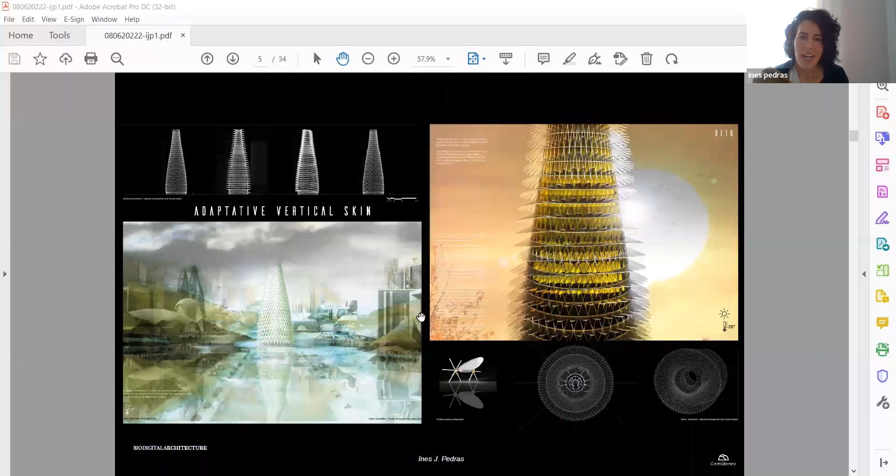Here is an example of how these environments change. We create an artifact that has different configurations, like on the left side is the vertical tower in the winter. It's a simple topic, but I want to translate this idea of environments and how they live like a living organism—the building, for example, needs to be closed in winter. In summer, it rotates the scales, or petals, related to any flower, so it opens to the sun. The configuration varies between winter and summer.

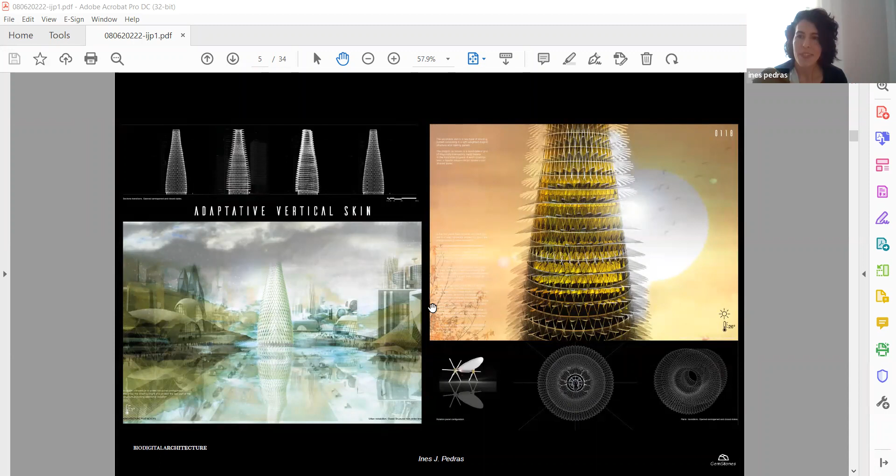This notion of living organisms is a key point of my approach. So I started creating this material as a living organism, as I say. It started to create these cells by itself. When I have this material that I make myself with my own tools, I am trying to put it in a place.

For example, here I work a lot with small details. I want to go from the very big scale to the small scale, even microscope scale, and then focus on the constructive detail, how this can be related to the construction. I want to explain that the material is more than an element—it's a shelter of protection.

It gives me textures, it gives me color, it gives me light, and establishes the atmosphere of space and characterizes its existing reminiscence. It's the physical interpretation of the design in space, where it brings to life and allows for a set of multiple correlations between the user and, in this case, the architectural artifacts.

These architectural constructions are computer designed from the small detail to the biggest scale. Everything is computational, and you can change the parameters, and you can see the length and the difference in the corners, and all this is related to membrane materials.

I also like textiles, so you have this kind of textile, and you give it structure to hold the stability. The same happens with the construction details—it becomes a research organism that develops all its functions in the membrane.

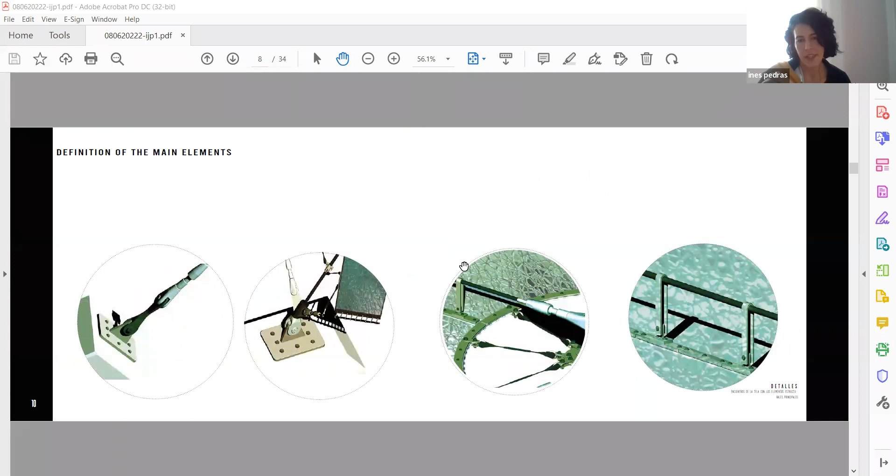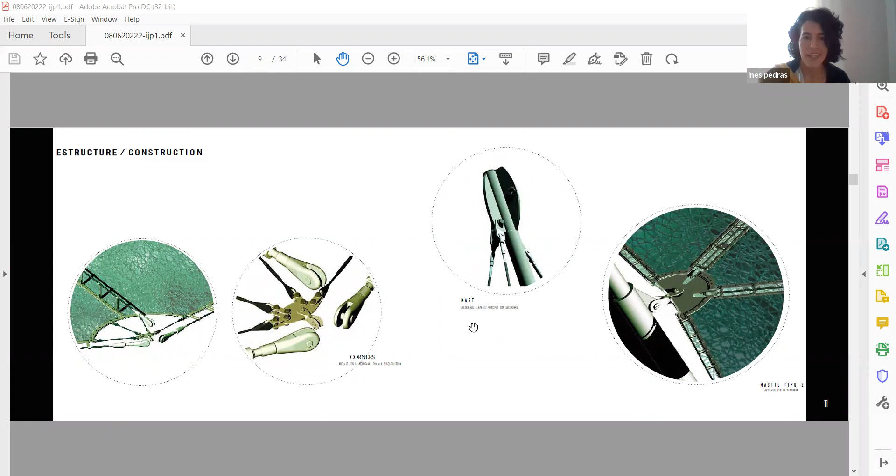I think it's easy to understand—here I define the main elements of the membrane, like the anchor points, the flexibility corners, I have the mast. This is membrane, just membrane freeform architecture, and the corners, how these construction details of the corners work.

I started to detail every small piece of it. The construction details give us the character of the intervention. It could be just a constructive detail, but it could also be a piece of art—it has to be designed at a small scale, but it's also like a big thing.

Even in the exhibition, I want to explain all these constructive details that are 3D printed, and how they construct the maximum perimeter with the minimum material, just with small connections. The membrane constructive details are one of my favorites because they give us free forms—this is very flexible and generates less impact on the surroundings.

This is very sustainable, because it's not just that you put a fabric or a very strong structure. You put just a textile, a membrane with a connection and a constructive detail, and it's very sustainable.

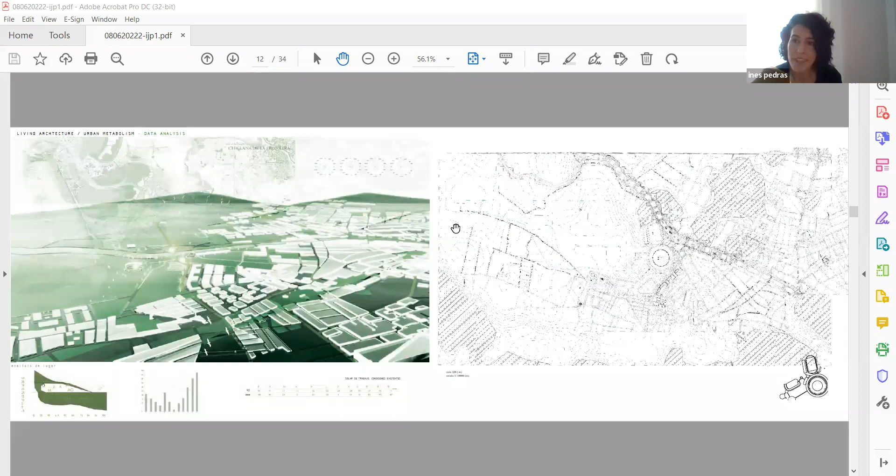The ways the cities, the light, the pre-existences, the buildings that happen in the place will modify the project, and also the wind, the landscape, the topography. Here in this case, there was a river nearby. So all of these membranes are related to the environment. The project works a lot with the environment.

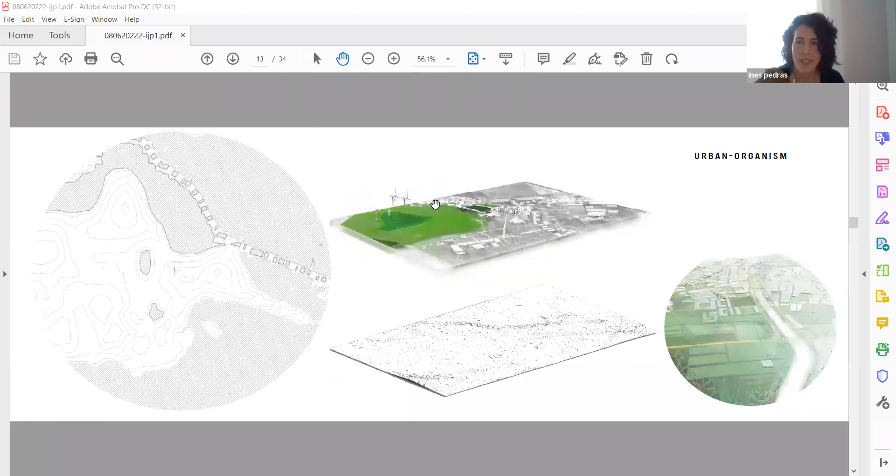Even my exhibition, it's not the same to be there than to be in another place. The environment is everything. Here, for example, we see this mapping of Barcelona, and in this mapping we see these roads that configure the membrane. So they have this kind of geometric shapes, like a painting connected with branches that grow in different directions in an organic way.

So we can see a urban city, we can see a small microbiome growing along the flexible material. We can see in 2D these branches grow in different directions - it's just a matter of perspective.

I translate, this is, for example, an idea of how the waste materials that happen in Barcelona create a datascape. It was related to another project, but it was like this landscape of data that applies in digital forms that I can create with parameters.

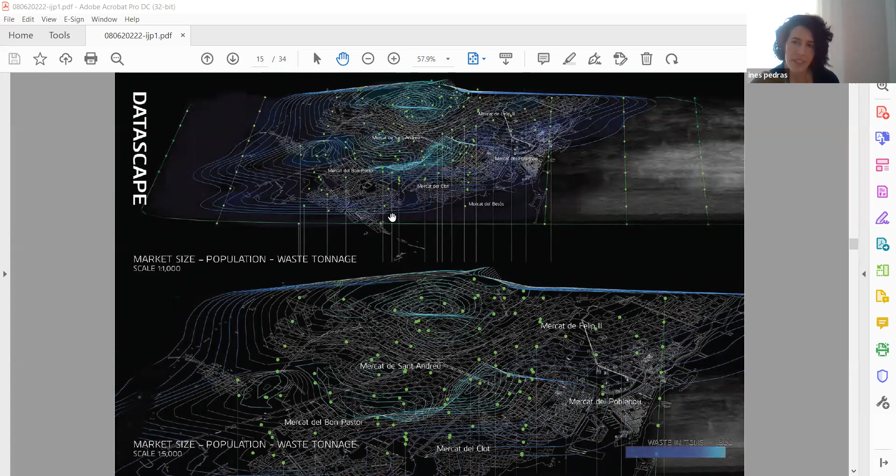So I am working on the computer, putting in different data, and the data creates the landscape. It's related to a realistic project happening in Barcelona with all the waste material, the data, but it's also related to a landscape that creates the data. So the data itself creates the project.

For example, here is a constellation of different data points that creates - the main points are the places where the waste is bigger. This creates an environment, a triangulated environment from the urban space. As I see here in 2D, we see a triangulated map, a constellation mapping.

It's in 2D, and I want to translate this to the workshop that I did in Tashkeel, because it was super - in my case, I love to teach people in 3D dimensions. People in the arts work a lot in 2D, but 3D gives us another view. So we started doing our workshop with 3D structure.

It was with very easy materials, very open to work with hands. With this constellation mapping relating to data, we created these kinds of structures - it was so much fun. At the end, we created this just to learn how the triangulated structure gives us the most stability, because the triangle is the most simple, but also the most stable form in the geometrical world.

So the basic shapes give us the most stability. And this kind of concept - less material and most properties - is related to the maximum perimeter, less material, and less toxic materials, so more sustainable.

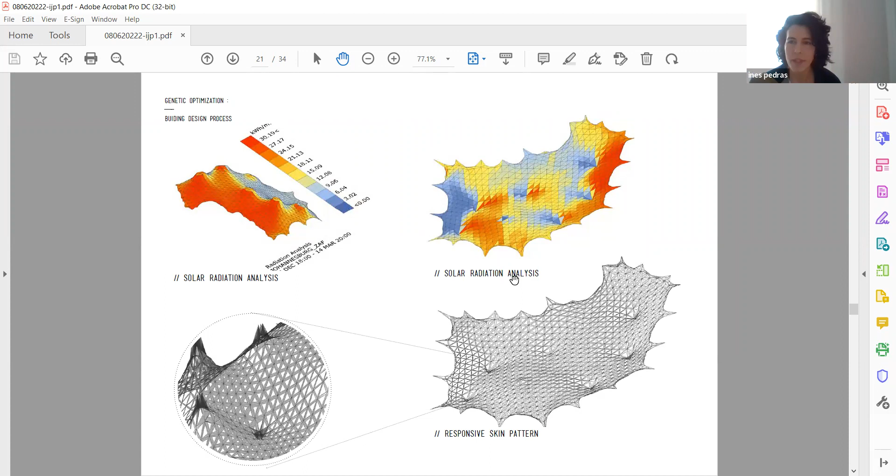So here is another analysis, but in this case it's not just forces, it's optimization in terms of solar analysis, like we put exactly in Dubai where there is a lot of sun. So we need to do a lot of solar analysis. There are points where the radiation of the sun is bigger than others, so we have these tension, critical points that we have to analyze in more detail, and these construction elements we need to focus on.

So here are all the results from the catalog, from the solar analysis. All of these analyses give us data, and with the data we translate it to the project to see - it's important not just to see, sometimes the data changes the project a little bit, but in general it's just to know if it's working.

And here there are different masts, like the membrane is hosted by masts, and there are forces in it that have to be taken care of. So there is a notion of integrity that I want to explain later - how the individual parts have to be in equilibrium and working well themselves to work as a whole structure. The individual parts can't work alone, they have to work together.

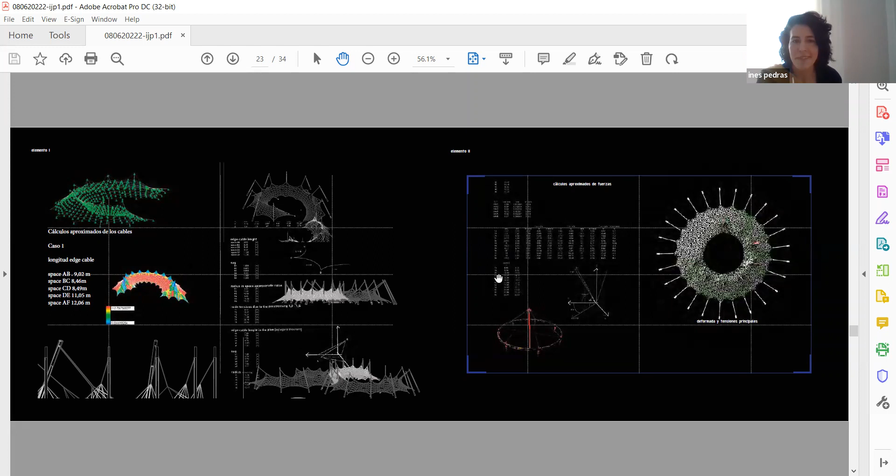So all this data in the computer, at the end, is also related to humans - like we have to work together to achieve good results.

So the project, more architecturally, translates into these growing organisms, like an animal growing into the landscape, and we create these free forms that grow along the landscape.

All these lightweight membranes are very flexible, but also have a lot of properties. As I said before, they achieve the maximum perimeter with the least material possible. They cover a lot - it's like you put the cover.

Here they grow like different branches, in different directions, like a star - starting at a middle point but growing along the landscape, along nature. So it's biodigital, but not just a replication of nature, just its behavior. Nature has the more optimal mathematical forms, so it's a replication of this kind of behavior that we found in biological processes.

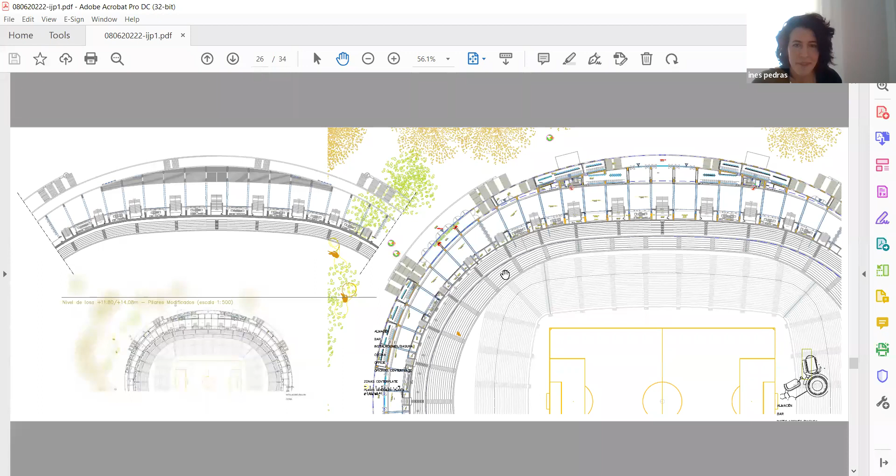So this project's program was related to a big stadium - because of the maximum perimeter concept, for example a stadium. So the architectural program was a stadium. It could be another thing, but in this case it was a stadium, with different elements and in the middle, the football field.

For example, here we see the facade as a branch of biological growing elements - we see it as a building, but also as a growing animal along the landscape. This also creates a lot of shadows, because the geometry is very specific, very unique, very organic, and gives us a lot of properties like shadows, light, textures. It gives the character of the place at the end.

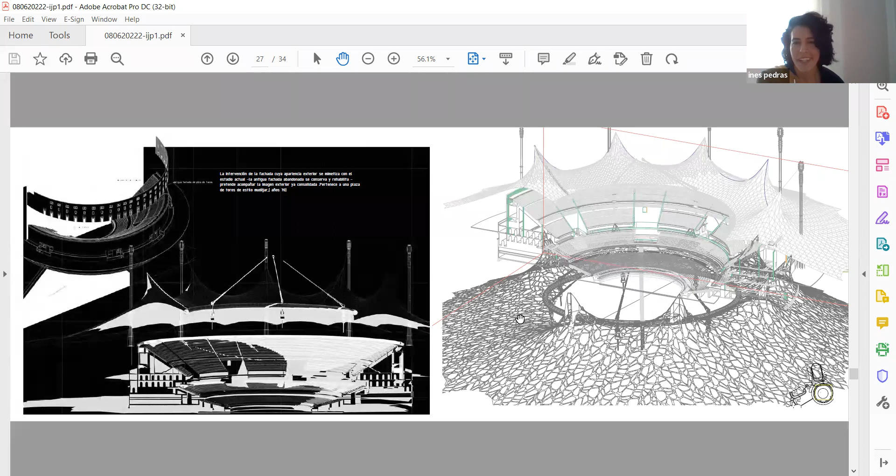So yeah, this is the plan and the section. And here, people sitting inside start to see this new atmosphere that grows with them. So they feel like they're not in a super stark place - they feel like they're part of nature, they feel like they are part of themselves. So this architectural plan wants to translate this notion.

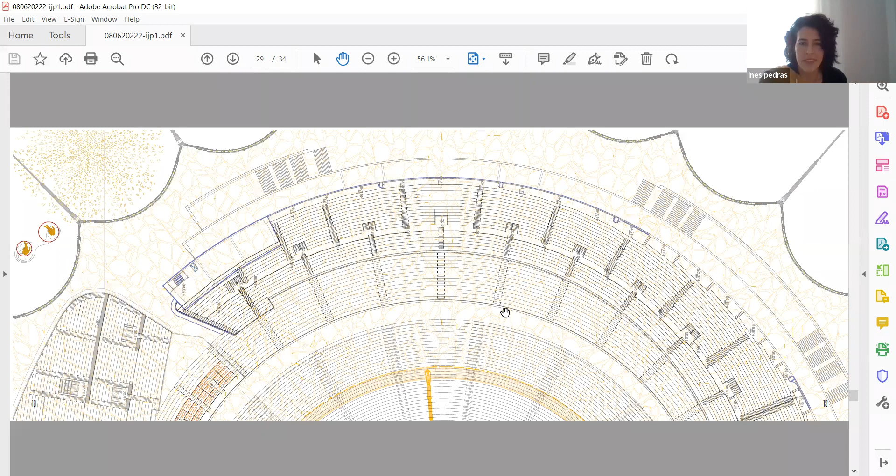Here is more the constructive detail. Everything has to be detailed down to the small pieces that have to be studied, just so we don't lose materials - if we do something wrong, it's not sustainable. So we need to study beforehand.

So we have the tools - the computational design tools give us capabilities, in the past it was not like that. So now we have the tools, we have the robots, so we can create as fast as possible and into detail.

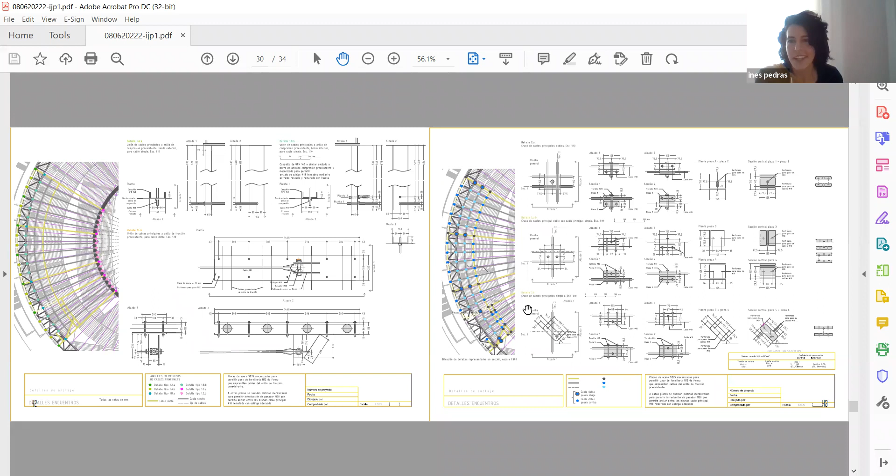Here is the structural analysis of how this membrane works. So I started by cooking the material myself, and then I started to create something very big. And now we have to study all of these structural elements, the construction elements, and everything that works - how to translate a very conceptual idea into a very realistic, very technical way, from the very free-form idea that came from art into a very specific structural way.

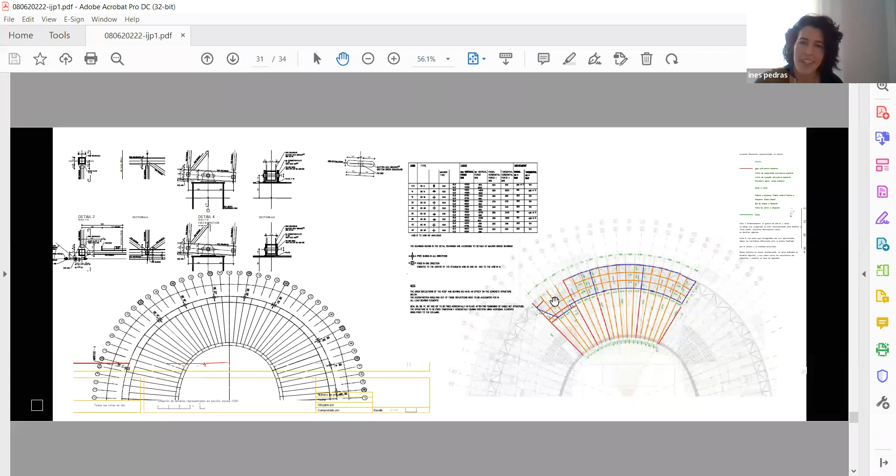And this is more elements, how these nodes are connected to each other, like the circle in the middle, and the masts, how they are connected with them. Just the small details of the construction. And yeah, I also like to work with simulation, just a small simulation of this growing organism working together.

So here, I want to focus on the construction elements. We have this kind of simulation in virtual reality, this is very fast, something very fast that I did.

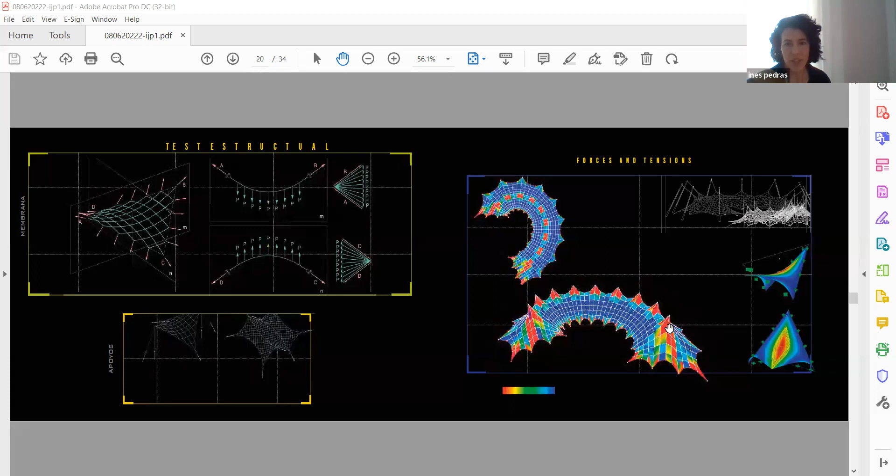The membrane has like the triangle, all are the same, no? Started with a triangle, for example. And from the triangle, I started to aggregate more, and create different geometrics. So a triangle is the simple shape, but if we put another triangle, it's not a triangle anymore. It's like a hexagon or a pentagon.

So it started to grow by aggregation, and also by scale, by rotation. So you apply different parameters to a simple geometrical part, and it started to grow in different directions, and it has to have different properties, and it's another thing, no? It's like transforming into something different.

Yeah, so these geometricals have different integrities, but they work together, no? At the end you see the result. For example, here you see a structure, or you see something here, no? But each element, or each node, each triangle has its own properties, and the whole of the properties constitutes the whole.

So this is the integrity as a society, no? Because it's very important to work in society. Everyone has their own part. Everyone is important, as in the geometry.

Every node is important, and it's also about changing the world, to do something different, to create new models that make what we have obsolete, so to create something for the future, because we are all going to live there. So we have to have this knowledge of what's coming next.

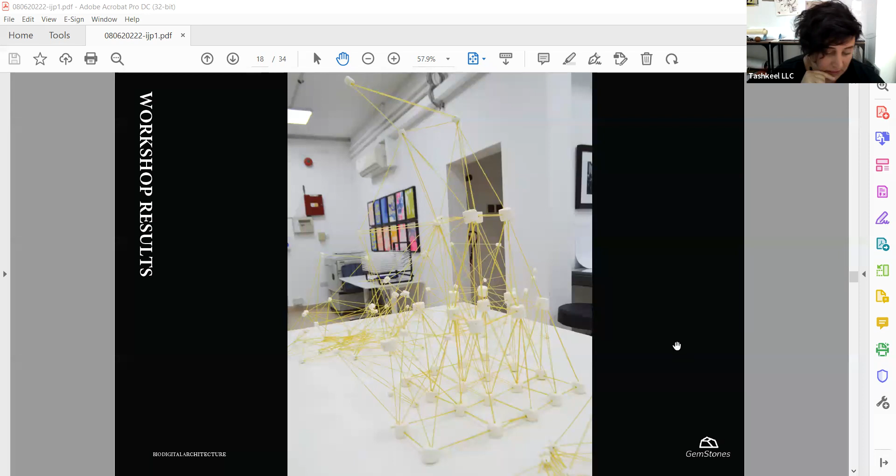Yeah, I mean, you do speak about, like, when you're also answering with regards to the humanistic values, it's more of a symbolic, philosophical understanding. Yeah, it's more philosophical, but with a practical side. I wanted to say that, like, with a practical tool, no?

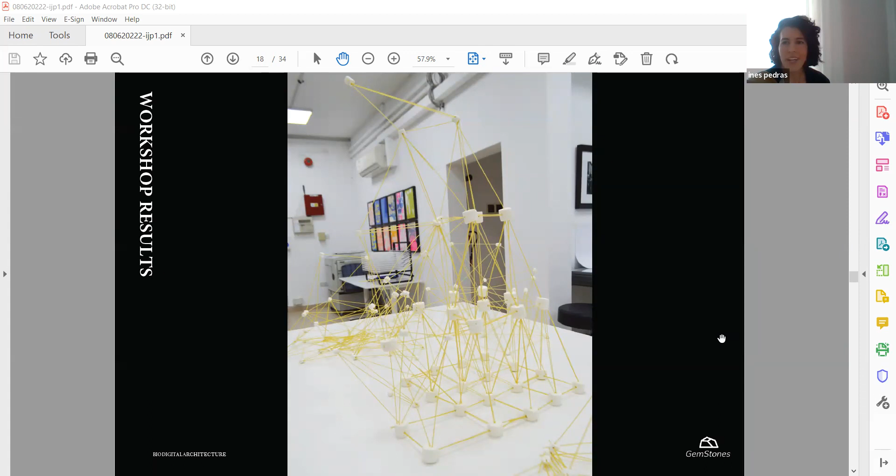So we see, because I wanted everything to have their own meaning, no? It's not just to see and nothing happens. You see it there, and it changes your mind and inspires you in a different form of thinking. So you didn't think about that before, and now you have a new window of opportunity to think differently, to open windows to new things.

Yeah, so you do speak about geometric integrities, or integrity in general, with, as you say, a philosophical understanding of it on a humanistic value, but you also refer to a non-anthropocentric understanding or view of these structures. So I wonder how that interplays.

Yes, we are not the most important, like humans. We have so many differences, and sometimes we don't work in the right direction. So I want to put it in a scale that shows we are very small, and how even the universe is so big, and sometimes we think we are the most important species in the world, and then there are like small microbes that give us...

Oh no, we are not. You are not the most important thing, the most important element on this planet. So this is kind of the view, no? So I started to be more humble to nature and more humble to our planet.

So really, the integrity at this level in the work is at the level of materiality and the parts, but also at a non-anthropocentric level, because it is kind of mimicking patterns that exist in nature that are not necessarily anthropocentric. Yes, correct. Right. Okay, yes. It's not that, yeah, I don't know if it's easy to explain, but yeah, it's exactly that.

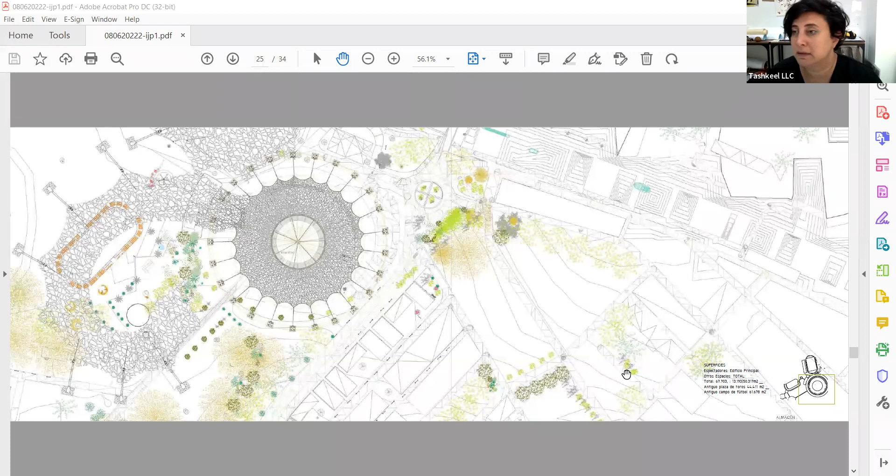Yeah, I mean, we have been in the material turn, as they say in art history, there was a shift in the view of anthropocentric versus non-anthropocentric. So it's now geared more towards material agency within this new materialism understanding. And I'm interested in understanding from you, you label materials as systems. How are materials systems?

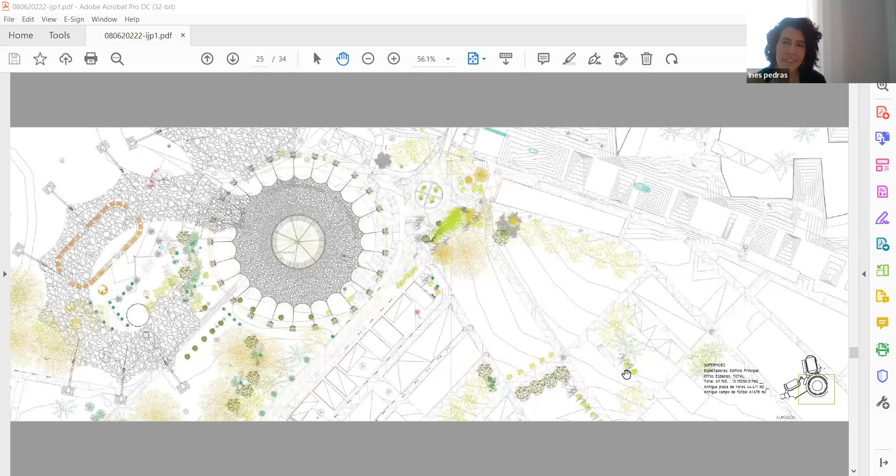Material system, no? So for example, the constructive elements that hold the material, creating all these constructive elements, give us the system. It's like the material, for example we see these green things are the membrane, but the membrane is surrounded by these structural corners and these flexible unions. So the system created from the material, this green thing, creates the whole system of elements around it. This is the material system.

So physically, the material itself is structured within a system that has a human intervention, right? So material systems are a combination between non-anthropocentric and human elements. Good point. Yeah, right? Yes.

I'm gonna push you on this point, but we have a question, and I will read the question. Do you think the selection of the materials used emphasizes the creation of contrast between the built environment and nature, or is it the architectural design that must create contrast?

I'm not sure if I understand. So the artificial element gives us more... No, say again please, it's two parts. So do you think, okay, do you think the selection of the materials used emphasizes the creation of contrast between the built environment and nature?

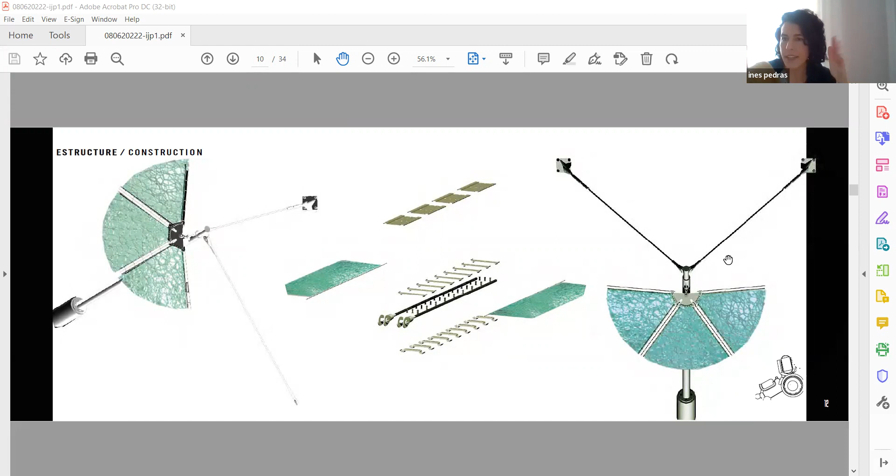The behavior is like, it's cold, so I'm putting more of this. It's summer, I'm putting less. Or also the sun is a lot on the window, so I will cover this part with something more strong, or it's less light, I put more window - this kind of behavior.

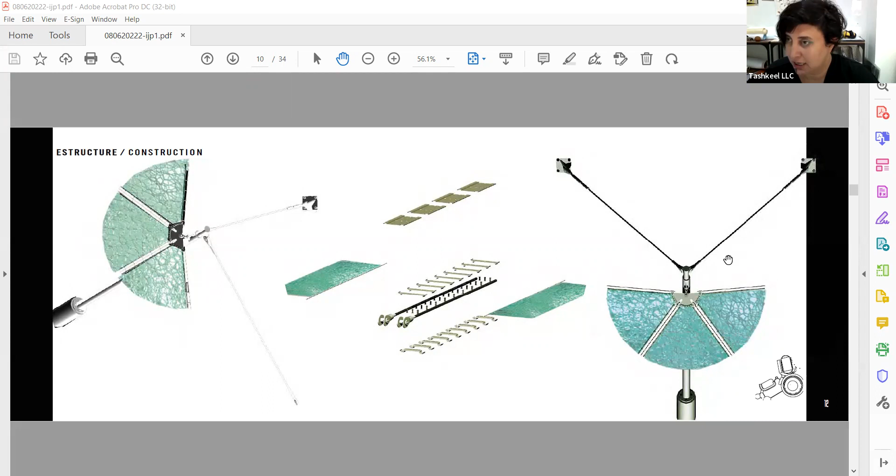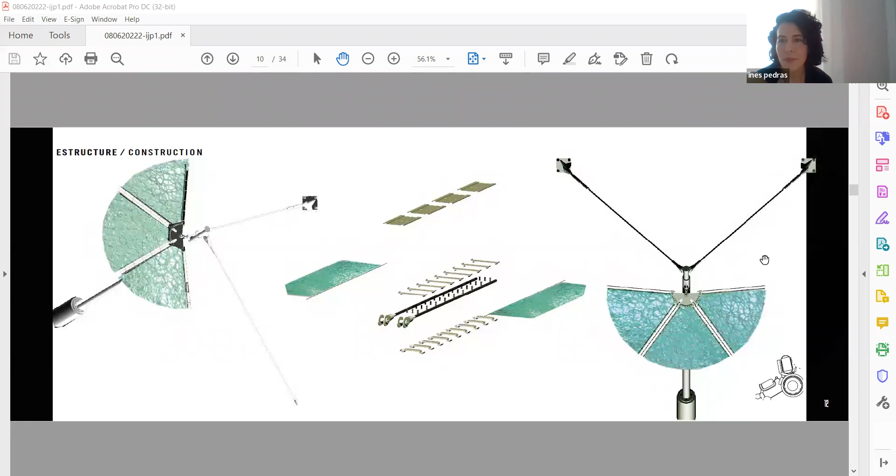But even that behavior is very generic in the sense of it's either this or that. And when we know in nature, it's like when you're cold you cover, when you're hot you uncover. Yeah, but it's very important, this notion. Because sometimes we forget the simple things, that we are nature, and we live in places that are not related to us. So we forget these small things, and our spaces, our artifacts give us like the mental health, even our lives give different properties. So don't forget these small things that are related to that.

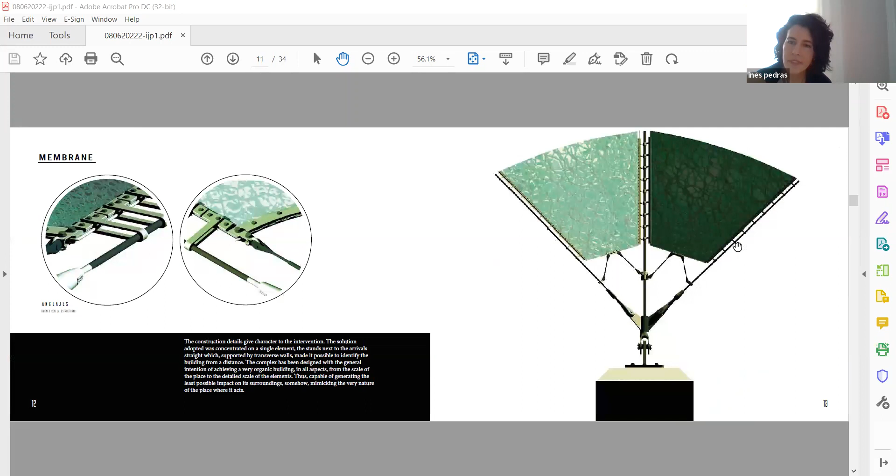Which then you apply to the other tower, in which, as you said, it closes during winter and has the possibility - it's just an example of how we have to create more clear environments with these notions.

I'm just trying to figure out this notion of integrity within the behavior of a non-anthropocentric material like bubbles, for instance, that then we put onto it a humanistic understanding of cold and hot, which is you put clothes on and cover or uncover, which is a very anthropocentric understanding of environment. So I'm curious about this notion of integrity within the parts, when the parts are not necessarily integral from their sources.